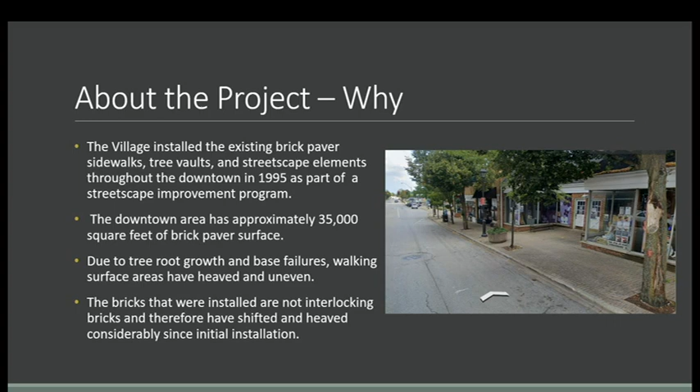Throughout the downtown area, there's approximately 35,000 square feet of brick paver surface. Due to tree growth and base failures, the walking surfaces over time have become uneven and in many cases create hazardous conditions. The bricks that were installed in 1995 were not interlocking bricks and therefore have a tendency to move.

Since 2015, the village has been setting aside funds for downtown improvements, including brick paver maintenance. However, at this point in time, there is a much more significant effort necessary to address the deficiencies. In 2017, the village staff identified strategies to address the deficient conditions.

One option was to replace the brick pavers with like surface. The second option is to replace the brick pavers with a concrete walking surface which incorporates decorative elements. Based upon discussions with various standing committees and the village board, the project will include the concrete walking surfaces with decorative treatments to retain the historic character of downtown.

The project will be using funds from the downtown TIF, which will expire in 2023 pursuant to Illinois statutes and ordinance. The remaining TIF funds must be spent by 2024.

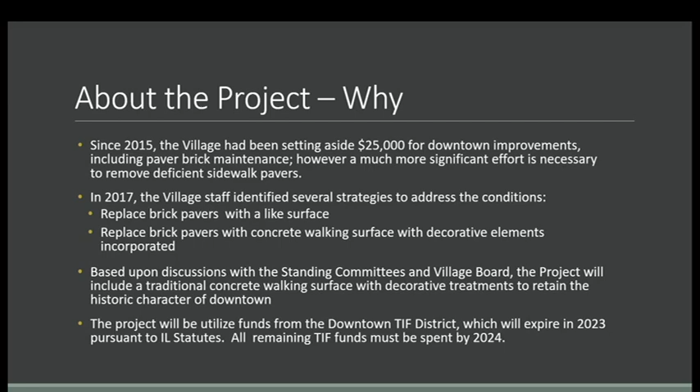The village has retained Robinson Engineering Limited out of Itasca, Illinois, to prepare the plans for this improvement. As mentioned earlier, this design concept was reviewed and approved by the Public Works and Environmental Concerns Committee in April of 2021 and the Economic and Community Development Committee in March of 2022.

The project team has completed the downtown concept plan, and the pre-final plans will be amended based upon feedback obtained at the public open house. It's anticipated that the project will be bid in early 2023, with the village board awarding a contract in February of 2023.

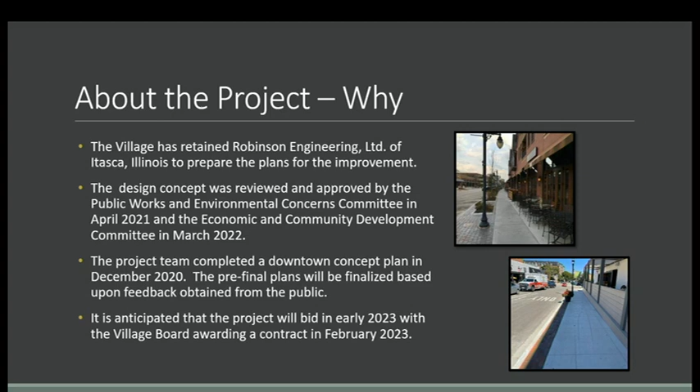The scope of the project will include amending the configuration of the crosswalks at St. Charles and Park, and St. Charles and Main, to reduce the diagonal crossing distance, which will effectively shorten the crossing distance and improve pedestrian safety.

These crosswalks will be replaced initially with asphalt and painted surfaces. However, as part of a project anticipated in 2024, a more decorative treatment of pavers and/or stamped asphalt will be included.

The project will include the removal and replacement of existing brick pavers with a concrete sidewalk between the building and tree vaults. Between the tree vaults and the curb line, we will be installing brick pavers in a recessed area to prevent shifting and movement of the brick pavers.

The village will be replacing curb as needed to assist with meeting the Americans with Disability Act, or ADA, to ensure that proper slope and cross slopes of the sidewalks exist.

The village will also be replacing the existing tree vaults, which are 30 inches by 30 inches, with vaults that are more appropriate and available for tree growth at 36 by 60 inches.

The village will be removing trees determined to be inappropriate or improper species for that setting. We anticipate the removal of 50 trees as part of the project. However, we will be replanting 25 more appropriate trees as part of this project.

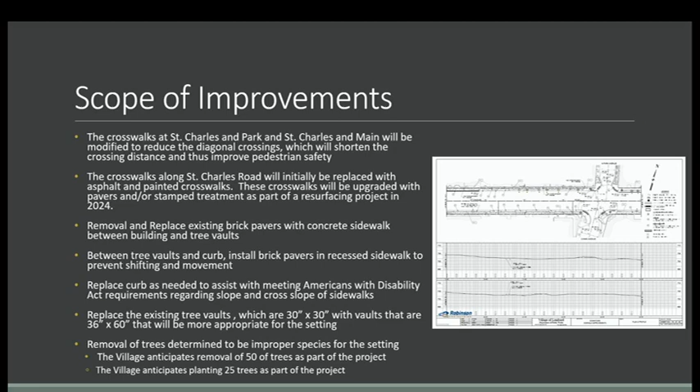To minimize future impact of the sidewalk project, the village will be replacing lead services for properties located within the project area, as well as looking to install cleanouts on sanitary laterals on an as-needed basis.

Downspouts for private businesses will be connected to the storm sewer system to eliminate standing water on sidewalks, which creates hazardous conditions. Additional streetscape elements, such as benches, garbage cans, and bicycle racks, will be replaced as part of this project. In addition, to encourage bicycle activity in the downtown, a covered bicycle corral will be located in the downtown area, installed north of the 7-Eleven in the Little Plaza along St. Charles Road.

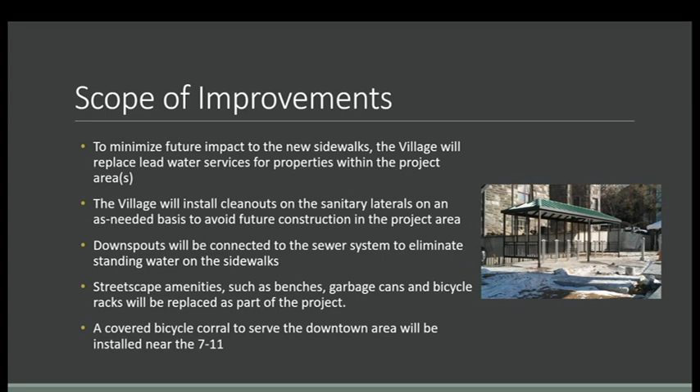The construction schedule and phasing plan includes breaking this project out into 3 phases. Phase 1 is the north side of St. Charles Road between Main Street and Elizabeth Street. The second phase is St. Charles Road between Main Street and Craig on the east side of Main Street. The third phase is the south side of St. Charles Road between Main Street and Elizabeth.

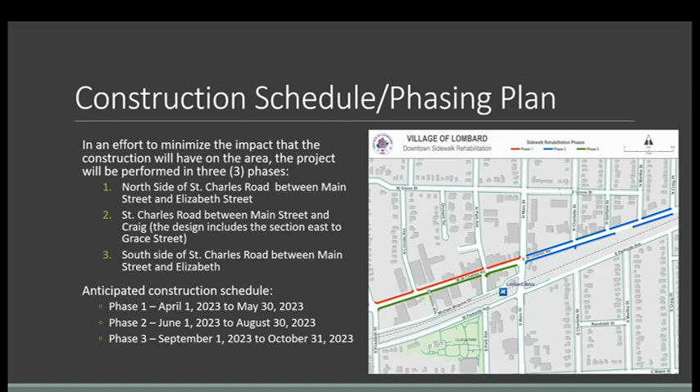The anticipated schedule for these improvements is Phase 1 will occur between April 1st, 2023 and May 30th, 2023. Phase 2 will occur between June 1st, 2023 and August 30th, 2023, with Phase 3 being completed between September 1st, 2023 and October 31st, 2023. This schedule was developed to ensure minimum impact on downtown events such as cruise nights or other activities planned for the downtown area.

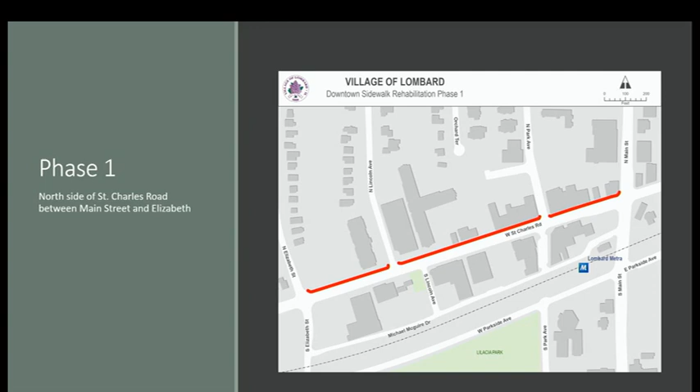How will this impact the downtown area? First and foremost, the village will ensure constant communication on this project. We will have a dedicated resident engineer for the project and a field office located downtown. There will be on-site observations during all phases of the project.

Due to the nature of the project, we will include a rolling work zone. We will maintain access to all businesses to the greatest extent possible. In order to ensure a safe environment, the street parking adjacent to the work zone will be closed to allow for staging and pedestrian access. We will work with the contractor to provide ramps and planking to be installed at each business to span the sidewalk or allow access.

There will be other discussions on how to maintain access, certainly communicated to each and every business as we move forward with the project. The project will include signage to alert customers that businesses will be open during construction. And as mentioned earlier, the project team will have constant communication with businesses throughout the construction activity.

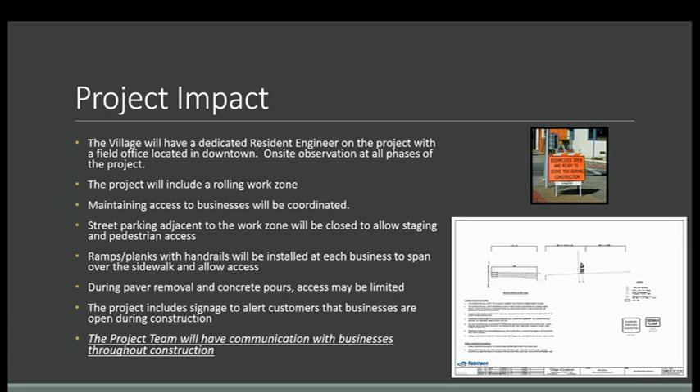What are the next steps of this project? Well, first and foremost, we want to hear from you as residents, businesses, and other interested parties. Once we receive those comments, we will develop final plans and specifications for the project.

The village will be selecting a resident engineer for the project, that will occur in November of 2022. We will continue to disseminate information on the project through various channels, including email, social media, and newsletters to be delivered to properties. We will have a dedicated project page on the Village of Lombard's website that will include a QR code, which will get you directly to that site, which will also be included on signage within the project area during construction.

We anticipate the project will go to bid in January of 2023, with a contract award by the Village Board of Trustees in February of 2023, with construction occurring on the schedule previously noted between April of 2023 and October of 2023.

We encourage residents, businesses, and interested parties to stay involved. Follow us on Facebook and Twitter, sign up for Notify Me, watch the news and local media for updates, as well as look for door hangers when your property may be impacted by the project.

Future downtown projects are also on the horizon. One is that the village will be resurfacing St. Charles Road between Grace and Illinois Route 53 in 2024. This project will be funded through a Federal Surface Transportation Program, or STP, funding source that will be coordinated to minimize the impact on the project area.